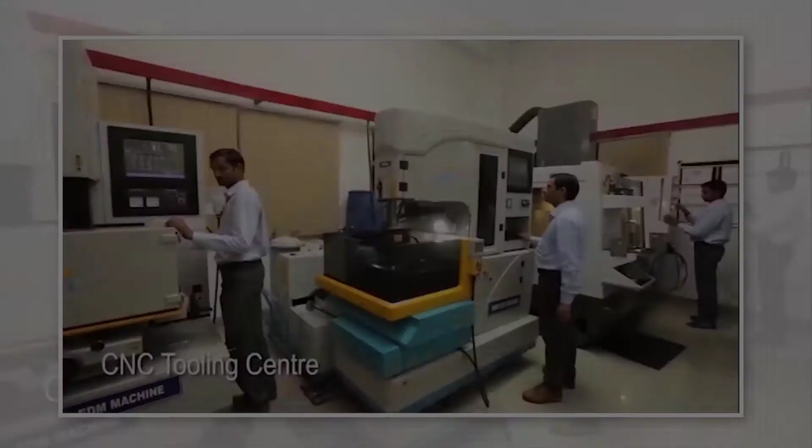ALP Nishikawa is a 200 million USD group founded in 1985. We are headquartered in Gurgaon, India, and have a global presence with 11 companies and over 2,000 employees specialized in EPDM, rubber, and other polymer-based products.

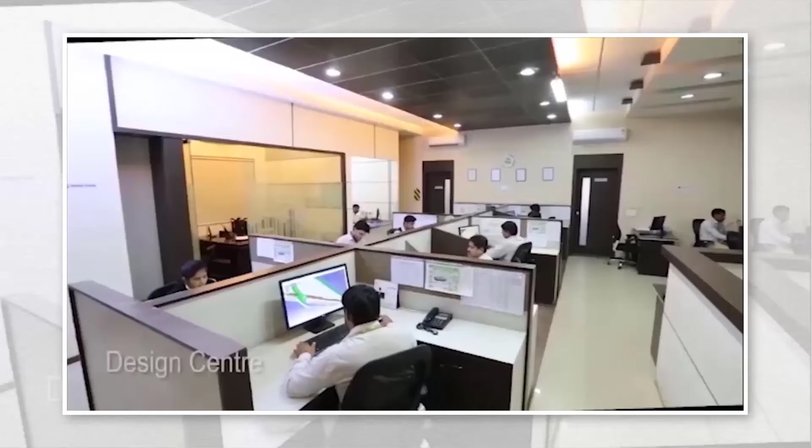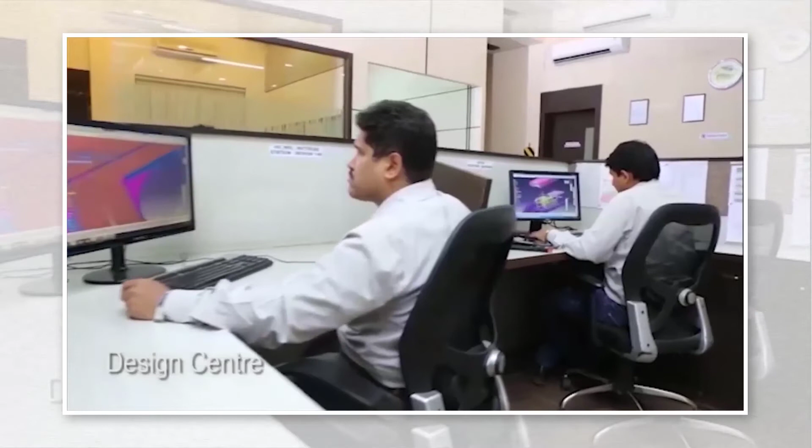Our flagship products are for automotive industries, but we also expanded rapidly in other sectors, including buildings and constructions and consumer household products. In our R&D center in Gurgaon, we have created a state-of-art design center using CATIA and other CAD software, such as ARES Commander. Altogether, our innovation is fueled by 90 product technology, 350 engineers, and over 65 senior manager professionals.

Automotive is an extremely competitive market. We need to adhere to very strict deadlines. Therefore, it is especially important for us to use the right tool at every stage. ARES Commander is the right one for our design stage.

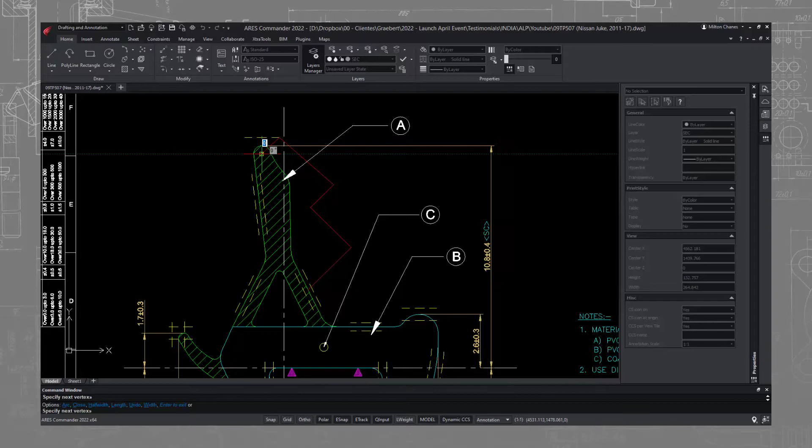Most of our users were previously familiar with AutoCAD. The transition to ARES was smooth. Most of them were able to start their work with ARES from day one, as it offers a similar look and feel and familiar keyboard commands.

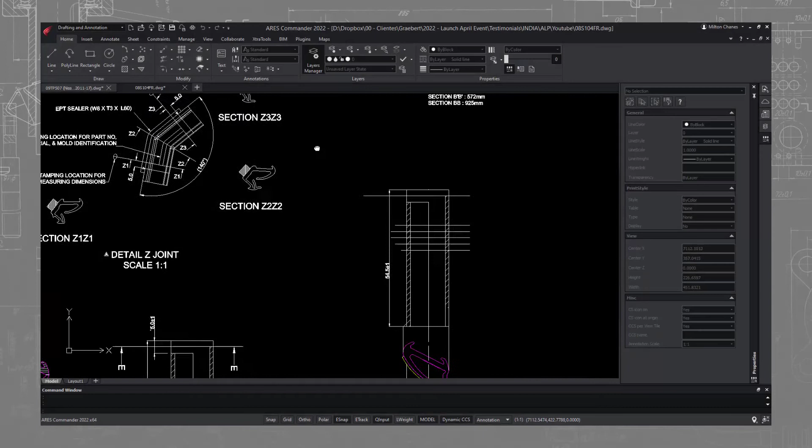It was also very important for us that ARES Commander is available with network license. It provides us with the flexibility to share a set number of licenses among multiple users to optimize our cost. In ARES, the network license setup is simple, and the Graebert customer portal provides us with full control of our license integration.

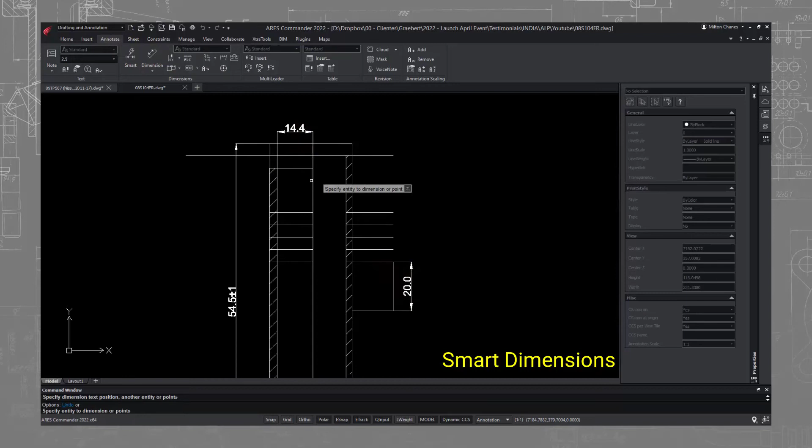Interestingly, ARES Commander not only helped us optimize our cost, we increased our productivity by 10 to 20% with time-saving features such as mouse gestures, power trim, or the smart dimensions tools. They contribute to make ARES more user-friendly.

The PDF import feature is also quite popular among our users. We use it to edit our old PDF files. With these commands, we are able to convert PDF into DWG and make quick changes as required.

To conclude, I would recommend any company currently using other CAD software to take a look at ARES Commander. It helps us, and I am sure it will help them as well. Thank you.